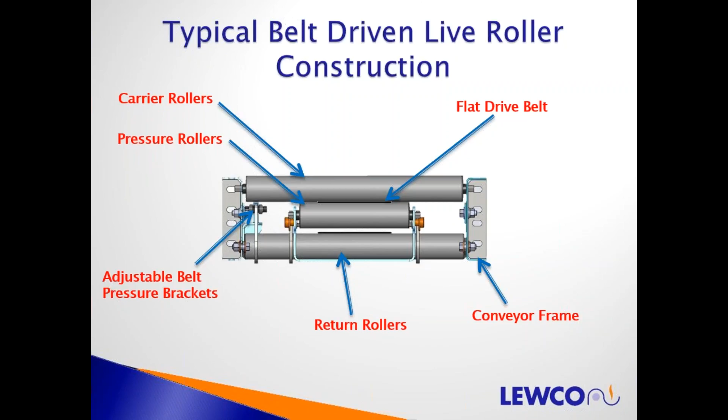It's that simple. We'll look at a side view of Belt Driven Live Roller Conveyor here. This was last an end section view looking toward the conveyor. This shows the carrier rollers - your package would be sitting up here and moving along the conveyor from right to left, depending on the direction of belt travel. Again, showing the carrier rollers.

The belt is next and is pressed up against the bottom of the carrier rollers by pressure rollers. The pressure rollers are mounted to a framework which has an adjustment on it to allow the framework to be adjusted up and down to set the tension, and that's attached to the conveyor frame. The return rollers are spaced much further apart, on the bottom side of the conveyor, and that's where the return belt is located. LEWCO's Belt Driven Live Roller design, the standard traditional one, has a flat belt on there, 6 or 12 inches wide, depending upon your conveyor width.

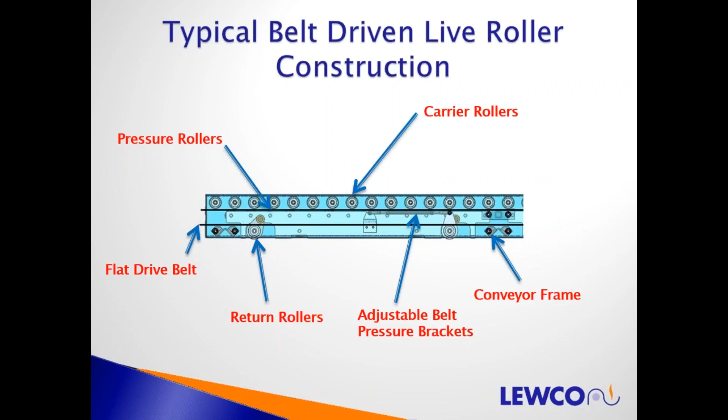Advantages to Belt Driven Live Roller: well, first off, it's probably one of the oldest live roller styles of conveyor made. It's very effective for straight running conveyors, very cost effective. It can handle a wide variety of packaged products - that's pretty key, we need products riding on the conveyor to be supported by 3 or more rollers at all times. Rollers are set high in the frame. Unlike some other styles of live roller conveyor, it allows for merging from either side of the conveyor, sliding products to or from both sides, whether manually or automatically.

You can go with long runs of conveyor. Most other styles of powered roller conveyor have limitations, either by the number of rollers or by the number of components that drive the rollers, or what have you.

With a Belt Driven Live Roller conveyor, you just have one continuous belt for just about as long as you can make a belt. We can drive curves off the end of a straight belt conveyor with a slave drive. Another key feature is that the line pressure can be adjusted by adjusting the pressure rollers we showed in the previous couple of slides. That allows you to have more or less drive pressure, and most of the time that's key when you're trying to get products from one point to another in a hurry, or if you have a wide variety of product weights.

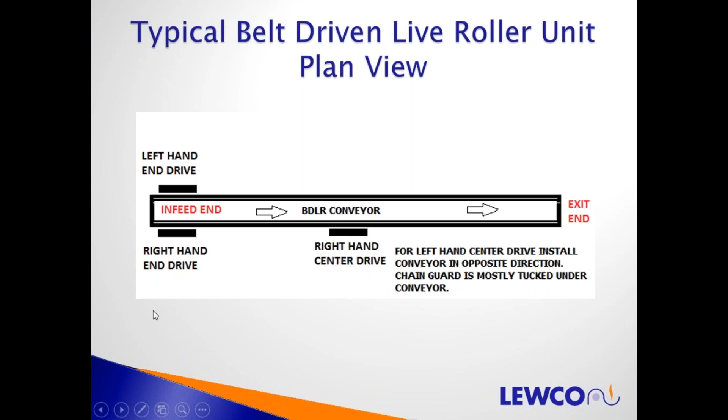Now, where can you use belt-driven live roller conveyor? Common places are warehouse and distribution centers. For long runs of power roller conveyor handling a variety of products, belt-driven live roller conveyor is very popular in that kind of environment. Manufacturing, whether you have a work-in-process conveyor or anything that can ride on rollers, we can drive it with belt-driven live roller conveyor.

Order fulfillment is another area - progressive assembly lines, parcel handling. There's lots of belt-driven live roller conveyor used when handling parcels. Traditionally, it's installed in a dry industrial environment.

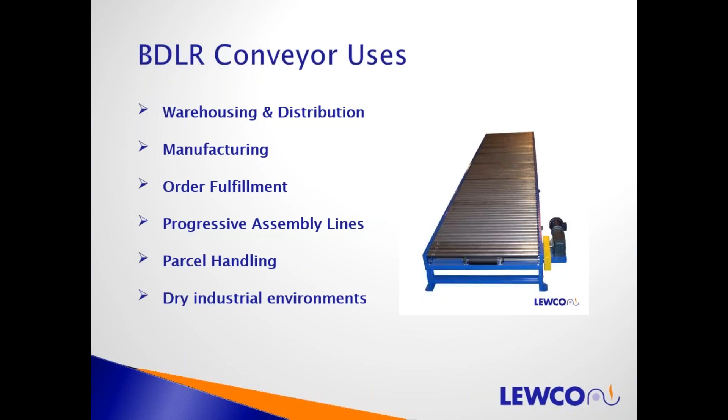That'd be the length, width, and height. Length is the dimension the product travels down the conveyor. The width goes across the conveyor, corresponding to the between-frame dimension. Height can become relevant if we have multiple levels of conveyor. Weight is important as well - is it lightweight? Do we have a wide variety of weights, or heavy products? They're all relative to each other, but they help determine which size and style of belt-driven live roller conveyor to use.

If there are situations where we have multiple directions to go, having the rate - products per minute or products per hour - is real key as well. Oftentimes you already know what size of conveyor and what speed you want, that's fine too, but if you're looking for application assistance, this is what we need to know.

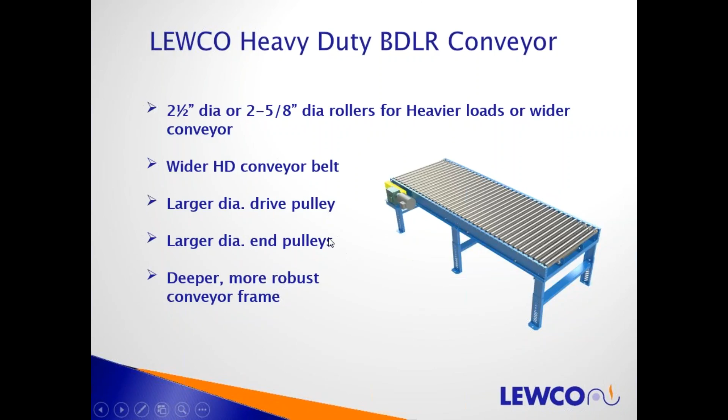The heavy-duty belt-driven live roller comes with a wider, heavier-duty belt just to get more drive. It's got larger drive pulleys so we can generate more torque, larger end pulleys to absorb that belt tension as it wraps around the end. In addition, the frames are deeper, the cross members are more robust, the support legs are robust as well. It's really a heavy-duty style conveyor for belt-driven live roller.

Going in the next phase, and this is where belt-driven live roller went next, is having an accumulation style conveyor. One way is you can accumulate by adjusting the pressure that we showed in the first couple of slides.

The next way to do it is to actually have pneumatically controlled accumulation zones for low pressure or zero pressure applications. By pneumatically raising and lowering the belt in zones along the length of the conveyor, we can effectively accumulate product.

Accumulating product means that the conveyor is still running but product's not moving. This happens to be the holy grail of conveyors, to be able to move something and stop at the same time without having to have several different motors or devices.

One of the very nice things, in my opinion, about zero pressure live roller conveyor that is belt driven live roller, is the belt drops away from the carrier roller surface and the rollers can then become free spinning. What that does is allow products to continue to coast forward from one zone to the next zone, and you can actually get a better accumulation, a better density of accumulation by using this style of conveyor than you can with other styles of accumulation conveyor, whether it's power roller, line shaft, or chain driven live roller.

Those are all set up by zones - you have one product per zone. Belt driven live roller, our ZPLR 19, allows you to accumulate more products. In addition to that, you can either have slug release or indexing release.

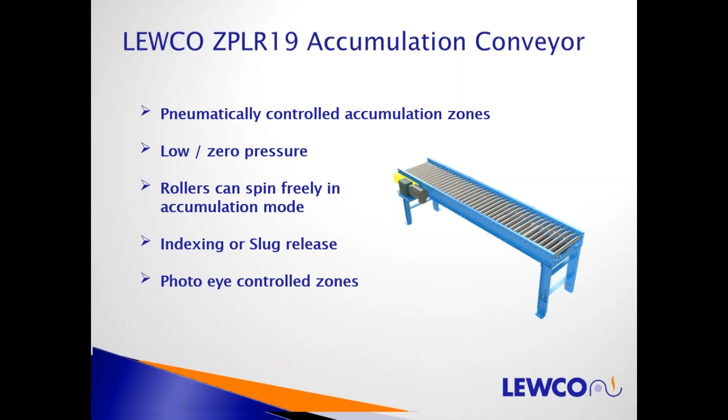One of the other belt-driven live roller conveyors that we have is our narrow belt BDLR. Instead of having a 6-inch wide or a 12-inch wide belt running down the center of the conveyor, we have a 2-inch wide belt which runs down right next to the side channels. The advantage to having that narrow belt next to the side channel is we can actually get narrower than our standard, traditional belt-driven live roller conveyor dimension.

This is ideal for adjustable pressure conveyor. It's ideal for lighter weight, smaller packages. It's still a 1.9 roller conveyor. Rollers are available on 2, 3, 4.5, 6-inch centers, and that's true with all of our 1.9 belt-driven live roller products.

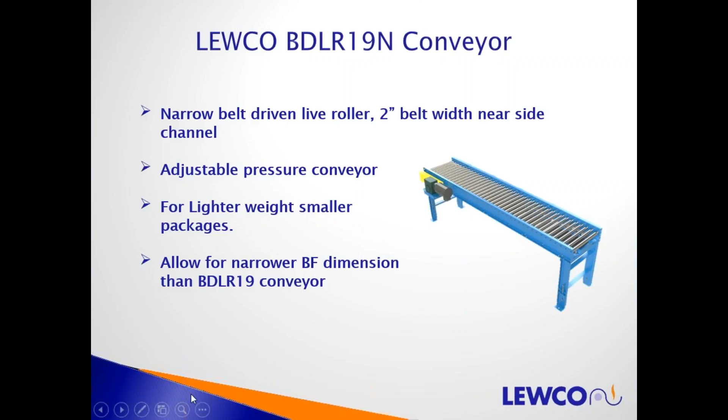Keeping in mind the same thing holds true for curves as it does for straights, the drive is located on the in-feed end of a curve on belt-driven live roller conveyor.

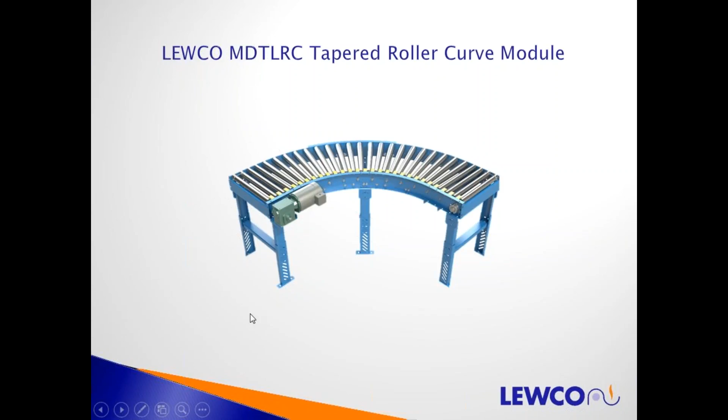In addition to belt-driven curves, we also have spur and merge modules that can be incorporated with the curves as well, depending upon the degree of operation, whether it's 30 degrees for a spur or 45 degrees for a merge. LEWCO has these as standard options available. They can either be slave-driven from the end of the straight conveyor or self-powered, with the motor on the side of the conveyor. We have underslung motors as well.

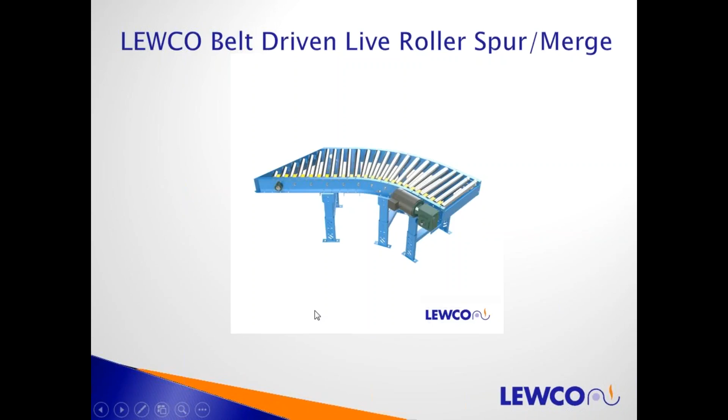Keep in mind, we do motor controls. We do control panels. These are options available from LEWCO as well.

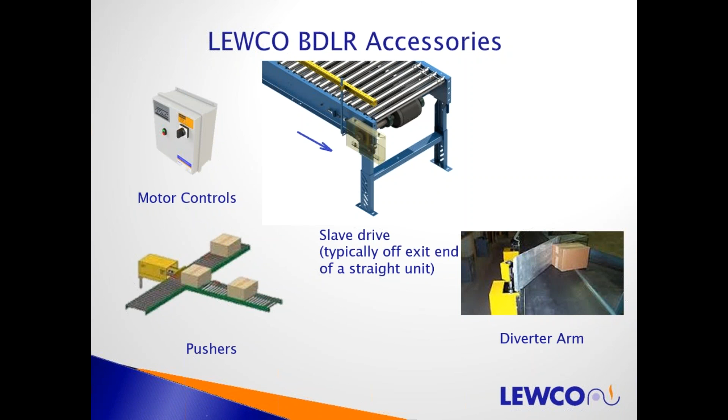We've touched on a variety of different kinds of products available from us, and we don't expect you to remember everything that we've talked about. That's why all the information we've discussed is available on our website. When you go to the LEWCO website, LEWCOinc.com, and click on products, right dead center is belt-driven live roller conveyor. By clicking on that, you can get to all the specifications for the conveyors that we've talked about.

I'm going to do an example of a price using our sales portal. Some of you may be signed up for it, some of you might not be. I'll go through it quickly. You'll see an example of how we can get a price for our belt-driven conveyor. As soon as I get the page up here, sorry about that.

This is in our portal. You've already had to sign up and sign our NDA in order to get this kind of level of access. But what you'll find is when you get into preparing one of your quotations, by clicking on the items, we choose belt roller conveyor, which is our terminology for belt-driven live roller conveyor, and we'll click on configure.

And I got an error. That's great. Well, we'll go back to the one that I did then. How's that sound? Hopefully. Well, this would be embarrassing, wouldn't it? I'm going to go through the long way then. There we go. Belt. There we go. Now I can get to it. Okay, we'll do it this way.

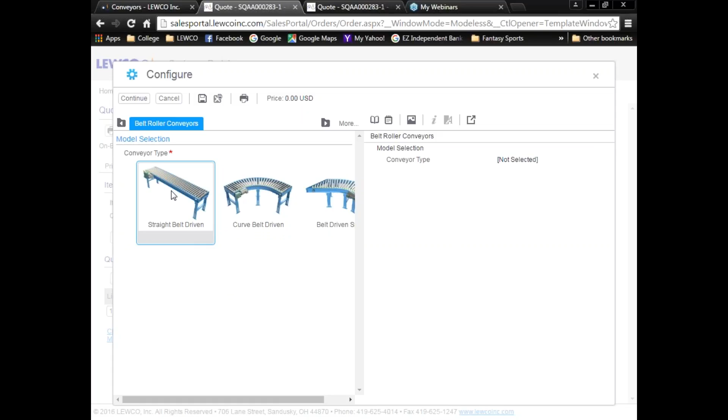Click on configure. This will allow you to take a look at the variety of options available and how it affects the price, keeping in mind the price shows up live up there. Today I'll just pick a straight belt-driven live roller conveyor. We've talked about 1.9, 16 gauge, the most common size roller used in belt-driven live roller. I'll choose that because we've got packages that are 75 pounds or less.

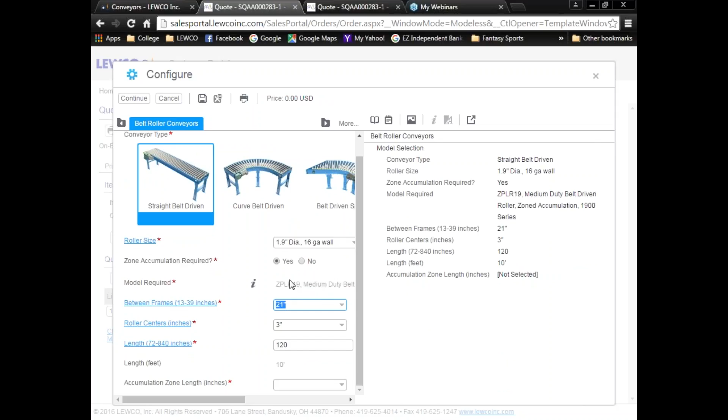I'm not going to price a zoned accumulation, but you can just add the word 'yes' and it changes the style of conveyor, giving you the choice on the zones. But we're going to work on a standard traditional belt-driven live roller conveyor.

Oh, pushed the wrong way. There we go. We'll leave it at 21 inch between frame, 3 inch centers. We wanted our conveyor to be 25 feet long, so that's 300 inches, and that should fix correctly - yeah, the length is correct now.

For our bearing type, again, in power roller conveyor from LEWCO, we use sealed and grease pack bearings for all the power rollers. I like galvanized steel rollers. Some people like carbon steel rollers. I can show you the difference in a minute.

We'll leave this conveyor running at 60 feet a minute. It's a 25-foot conveyor, so we can keep it with an end drive. We'll fix speed, electrical controls - we'll work on those later.

In this case, we just need a 1/2 horsepower motor, 460 volt 3-phase, totally enclosed, fan cooled. But let's make it inverter duty just for the sake of argument. One of the things you can do by pricing in here is see what the price difference is to go to an inverter duty motor. It's $2,892 for this unit with inverter duty. If we went back to the TEFC, it's $2,819. You can see the inverter duty cost upgrade is not very much anymore.

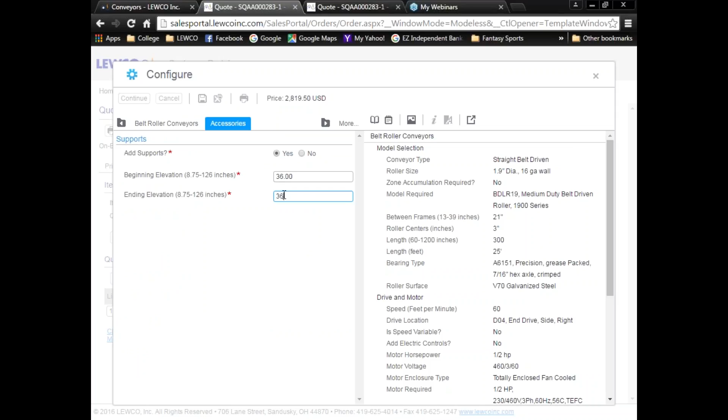We'll leave the standard belt type available for belt-driven live rollers. We'll pick the conveyor as blue. A couple other things you want to do - if you want supports, most people do, we just pick the elevation we want the conveyor to be at and run this conveyor level. Belt-driven live rollers should run level. We'll pick 10-foot centers, heavy-duty supports, because that's what LEWCO provides on all of our power conveyors.

Oftentimes, if you want an approval drawing, we can add that on there. One thing I want to point out is that when you add the approval drawing, it adds $50 to your unit costs. We don't automatically provide them unless you ask for them.

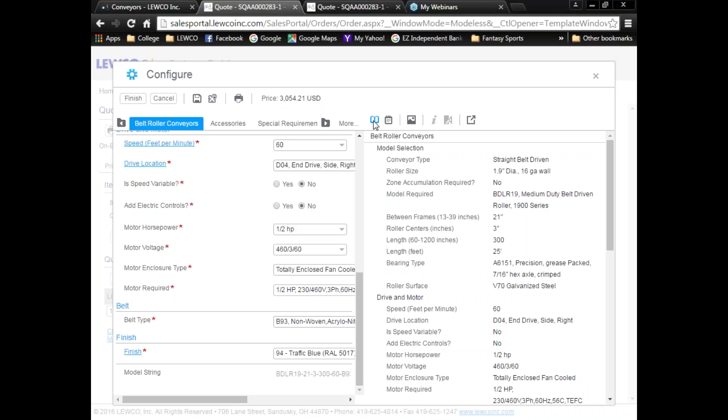Now what we've done is come up with a complete price for a belt-driven live roller conveyor, 21-inch wide, 3-inch roller centers, 25 feet long. Also, when you click on this, it's the summary description of the products. The next icon shows the price definitions.

Here's how much more it costs to have galvanized rollers. Here's how much the support cost is. Here's how much the approval drawing is. It's delineated in that second icon right there. Most of the default position is this icon, and it does come down and calculate.

Down the bottom of this part, the lead time, shipping weight, belt length, and roller count are all identified, and that all happened automatically. Click Finish - you can print it and save it in Word, and away you go to get that to your customer.